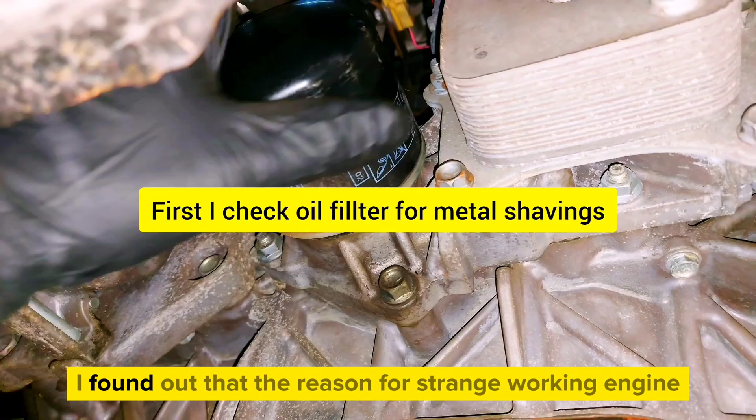Often in your comments you are asking when the part 2 of the Mazda video. So in part 1 I found out that the reason for a strange working engine was a crack in the crankshaft. So I need to disassemble everything to take off that broken crankshaft. So this is part 2 on the way of removal broken crankshaft.

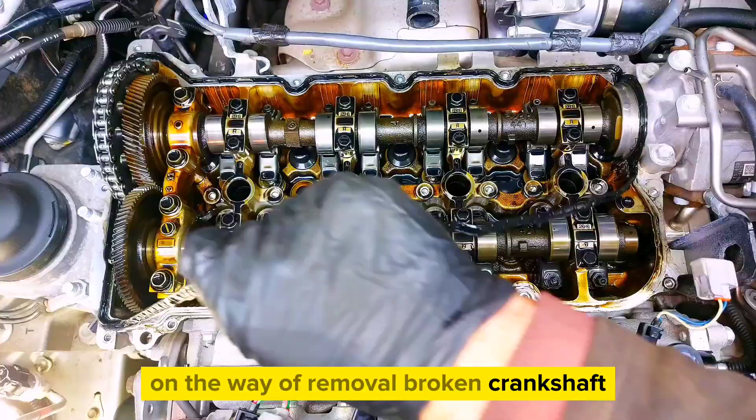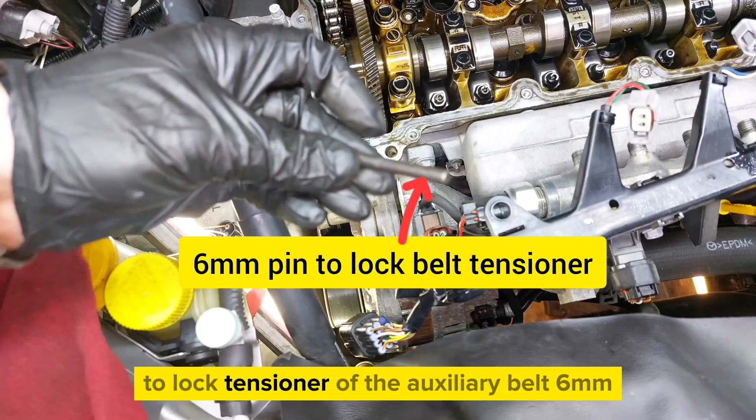6 hex to unscrew this pulley. You can hold with a 21 mil socket. And take off auxiliary belt. You will need locking pin to lock tensioner of the auxiliary belt. 6 mil.

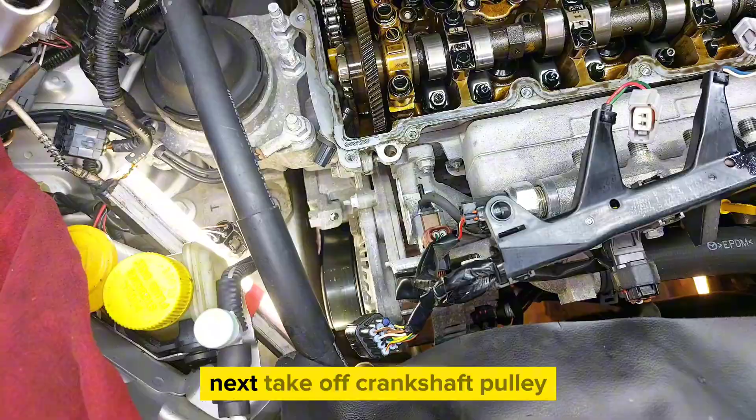Then drop it in the hole of the tensioner and rotate tensioner clockwise until this pin will lock the tensioner in this spot of the tensioner. Next, take off crankshaft pulley. And maybe you will notice some leakage from the oil seal, from the crankshaft oil seal.

Of course, you need to jack up the engine because you will have to take off engine mount. 17.

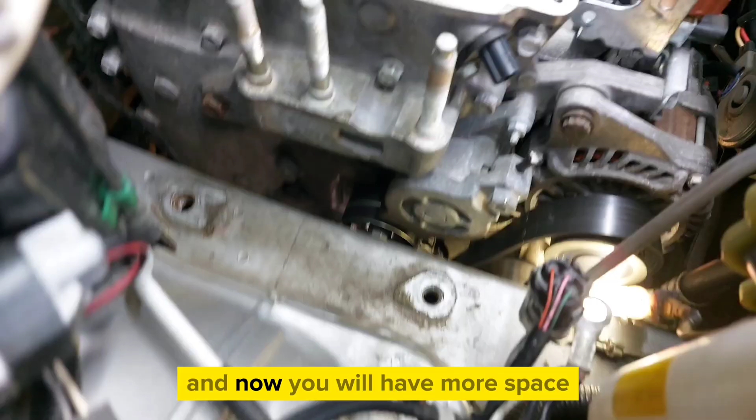And now you will have more space to remove auxiliary belt tensioner. It's 10mm socket or wrench to undo 2 nuts and 1 bolt of the tensioner. And you need, of course, remove locking pin and then undo lower bolt. Here it is. Now I can easily remove this tensioner. Just lift up engine high enough so you can easily remove tensioner.

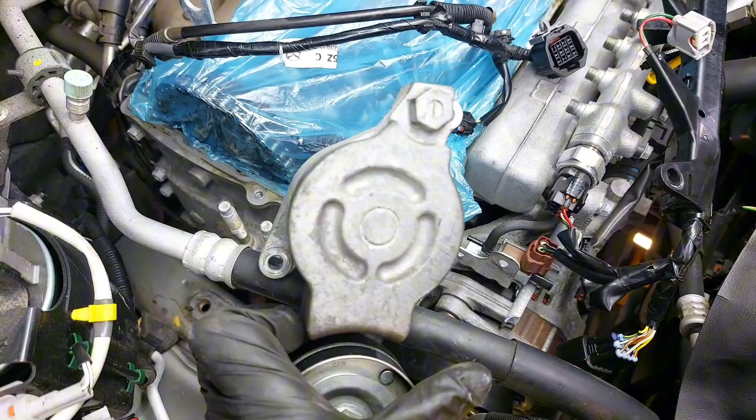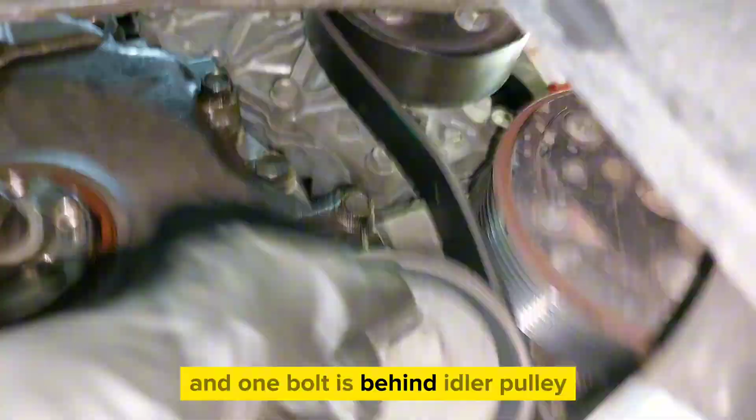Next step is removal of the timing cover, and you're gonna need 10 and 12 and 14 sockets. And these bolts have different lengths, so maybe you want to mark them before you unscrew. Also detach camshaft sensor. And 1 bolt is behind idler pulley, so you need to take off this pulley using 14mm socket. Next, using 10mm socket or wrench, take off crankshaft position sensor.

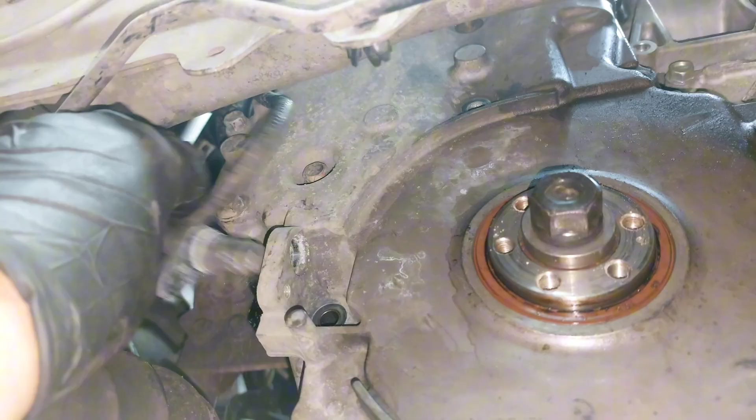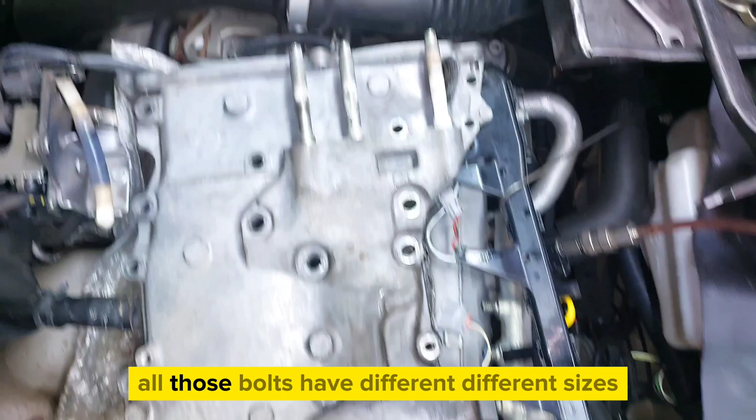And when you undo all the bolts of the timing cover, you can now separate it from the block. There are some special places for this procedure. And oops. Here it is. All those bolts have different sizes, so be careful when you install them. Some of them are longer, some of them are shorter.

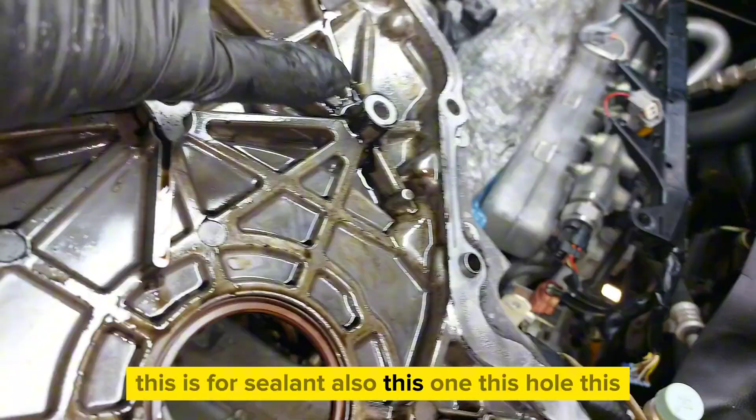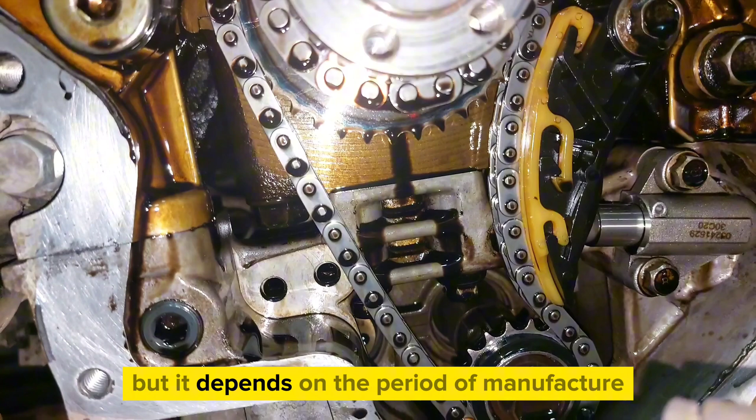And this is how you can apply sealant on the timing cover on those places. This is for sealant, also this one, this hole, this, and outside. Now we can set up engine on the timing marks. Camshaft timing mark is this big arrow pointing on 12 o'clock. Sometimes there is additional balancer chain guide, but it depends on the period of manufacture, so don't worry if you don't find it on your engine.

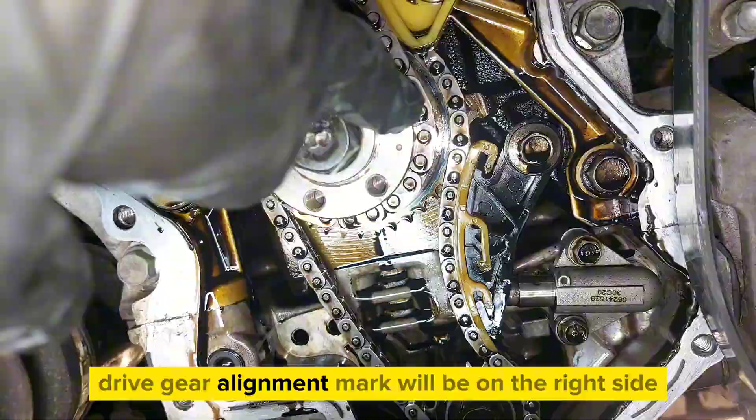And here it is, crankshaft timing mark for the main timing chain, and in this position pin for the crankshaft pulley will be on 12 o'clock. That means that cylinder 1 is in TDC, top dead center, and balancer chain drive gear alignment mark will be on the right side, and in this position colored links on the balancer chain usually will not match with the pin alignment mark on the sprocket. I show you why is that during the installation.

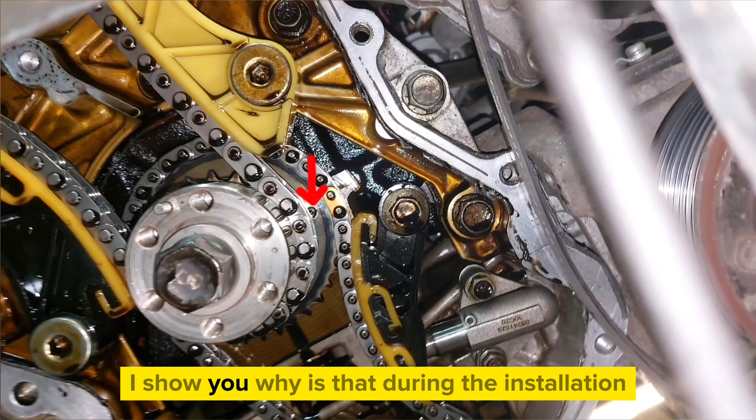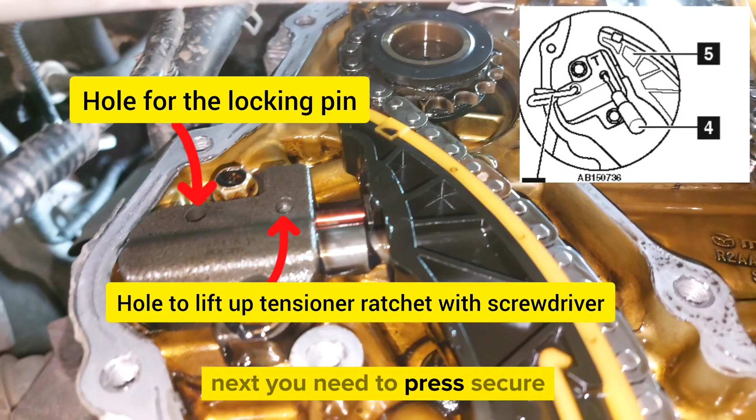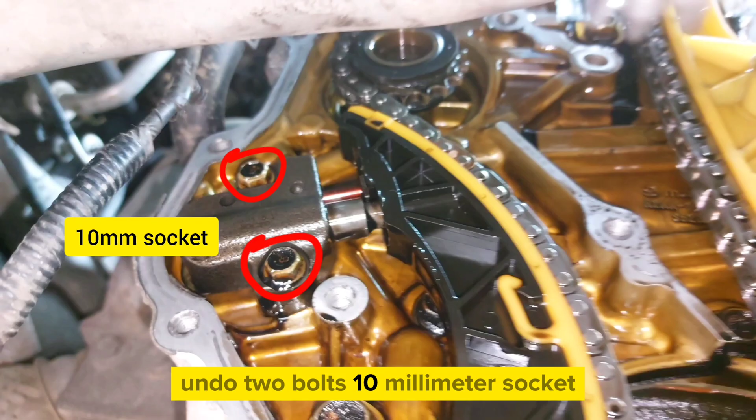Undo 2 bolts, 10mm socket. I decided not locking this tensioner and take it off as it is. Nice and gentle. And now this tensioner also go off. 10mm socket, and it locks in this place, and 8 hex to undo all these bolts of the timing chain guides.

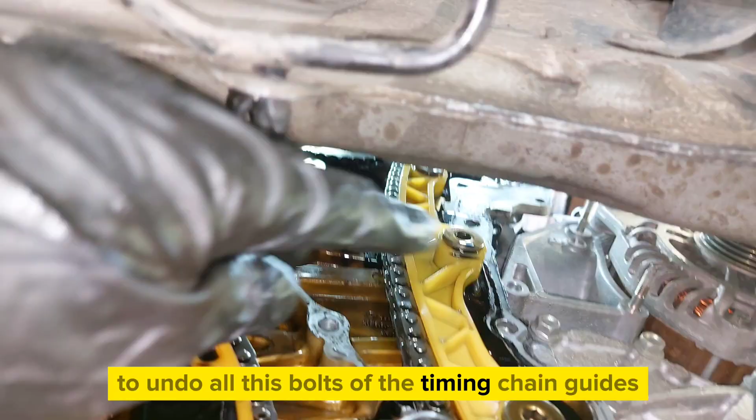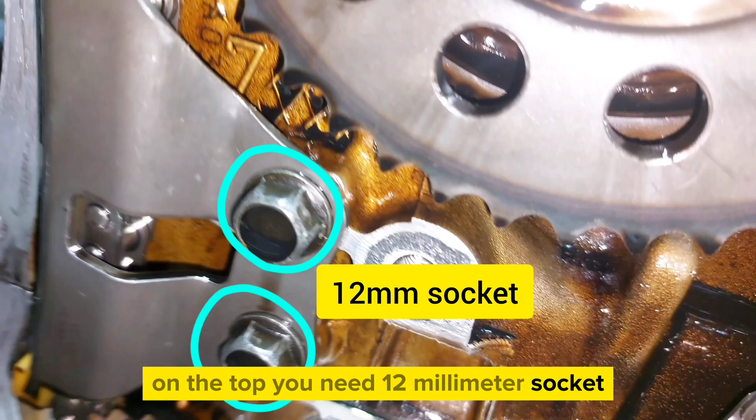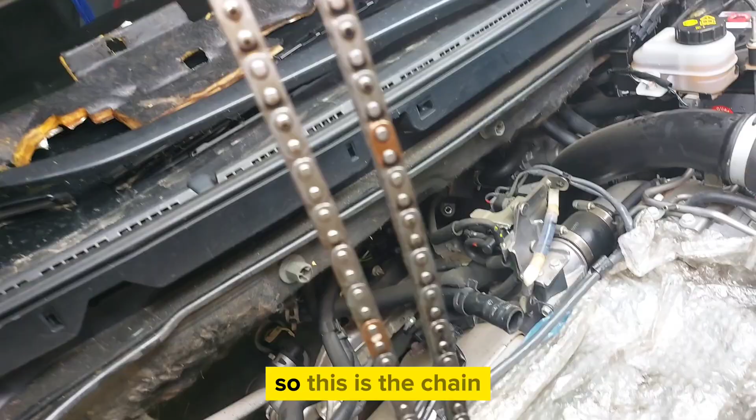To undo, this is 12. On the top you need a 12mm socket to undo bolts of the timing chain guide. So this is the chain. And you will be able to see alignment marks for camshaft gears. It's two dots on the right side and one on the left. By holding exhaust camshaft with 27mm wrench, you can undo camshaft sprocket.

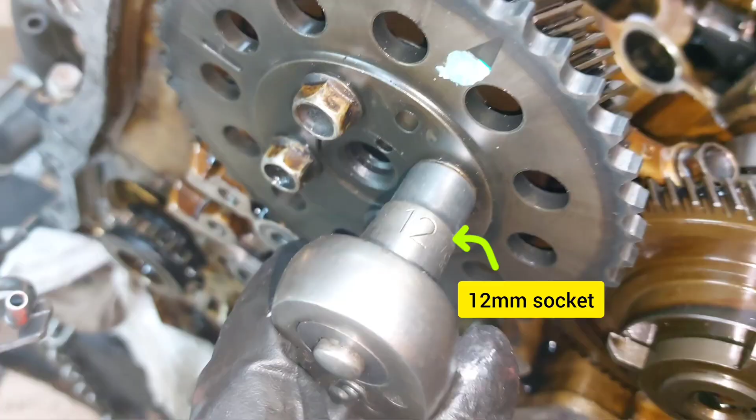And without this sprocket, camshaft gears alignment marks will be looking like that. For now, I will skip part of the engine removal, disassembling, assembling, just to complete this guide of the timing chain replacement. So removal, disassembling and assembling engine will be in the next part, maybe 3, maybe 4.

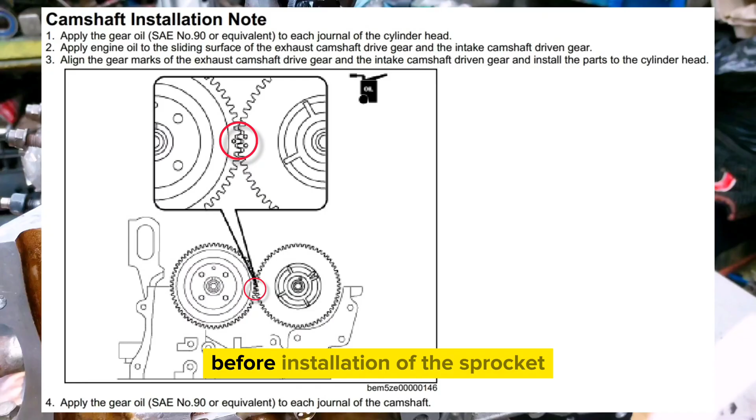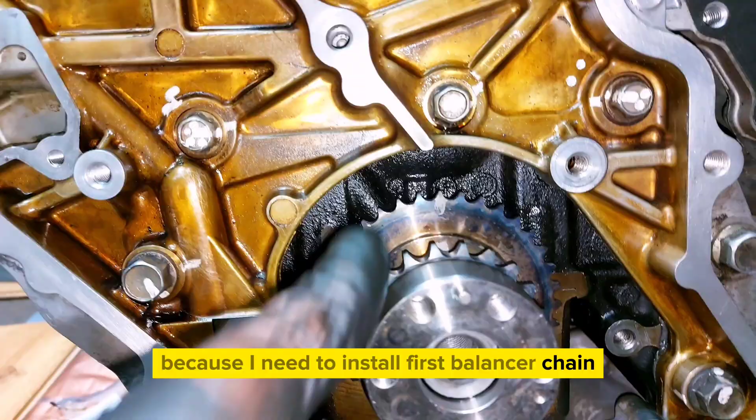Check alignment marks of the camshaft gears before installation of the sprocket. So install camshaft sprocket. And just to show alignment markings for the timing chain, I will install crankshaft sprocket, but then I will remove it because I need to install first balancer chain. So this is set up for the timing chain of the crankshaft and camshaft.

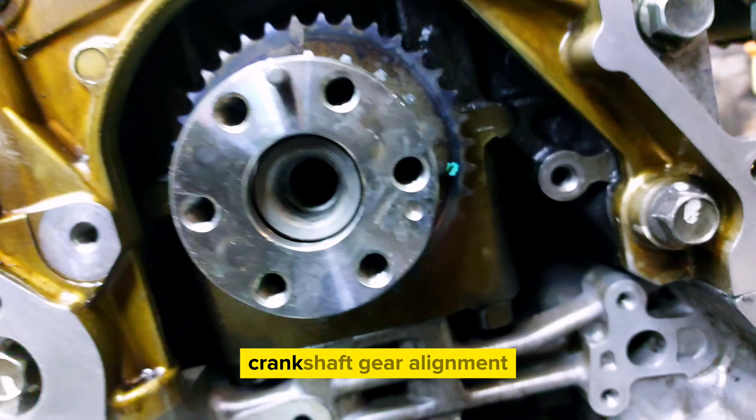Mark on the left should be on the edge of the cylinder head for camshaft gear alignment and crankshaft gear alignment. Timing mark. This one on this gear. In this position, pin for the crankshaft pulley will be on 12 o'clock. And also key on the crankshaft will be on 12 o'clock. And that's TDC for the first cylinder.

Pin for the balancer chain will be on the right side. And this is not correct position for the installation of the balancer chain. And colored links on the balancer chain will not match with alignment marks. So to install balancer chain 100% correctly, piston in cylinder 2 must be in TDC, top dead center. Then alignment pin will be on the left side, and that is correct position for this alignment pin of the balancer gear.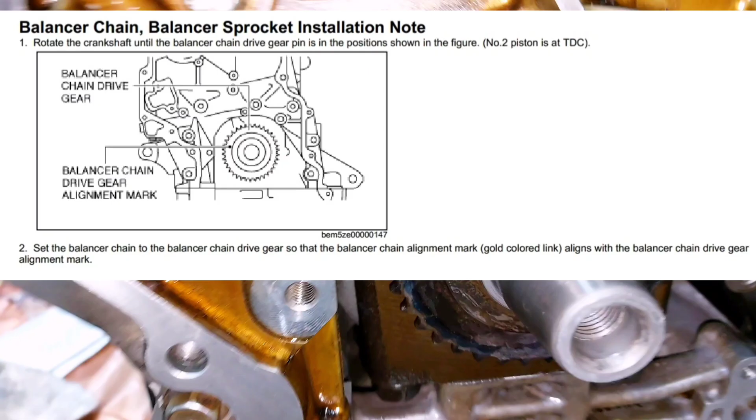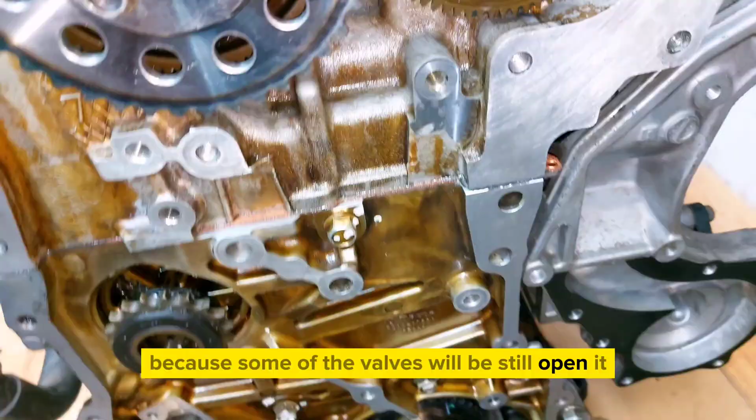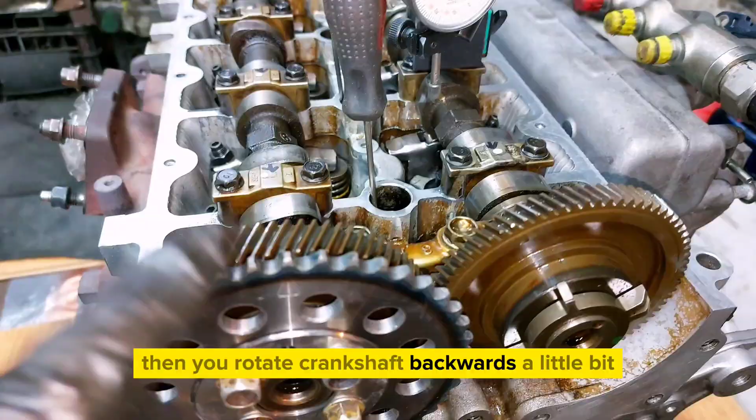So now to know in which position is this piston in second cylinder, you can use screwdriver or indicator. Then rotate crankshaft anti-clockwise direction, just a quarter of turn, because some of the valves will be still open and they won't let crankshaft rotate, so you need to rotate also camshafts to close those valves. Basically, you will notice when you rotate crankshaft, it will stop and you won't be able to rotate it anymore. Then you rotate crankshaft backwards a little bit and then rotate camshafts.

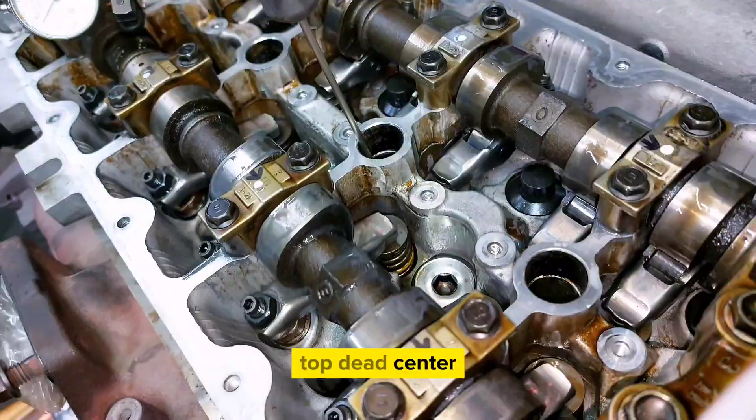So camshaft lobes will be on top in cylinder 2. These two must be on top. Then you rotate crankshaft in clockwise direction, and this goes up and stops in TDC, in top dead center. So this pin is on this side. Key for the crankshaft sprocket will be on 6 o'clock, and also this one tooth will be on 6 o'clock. 6 o'clock.

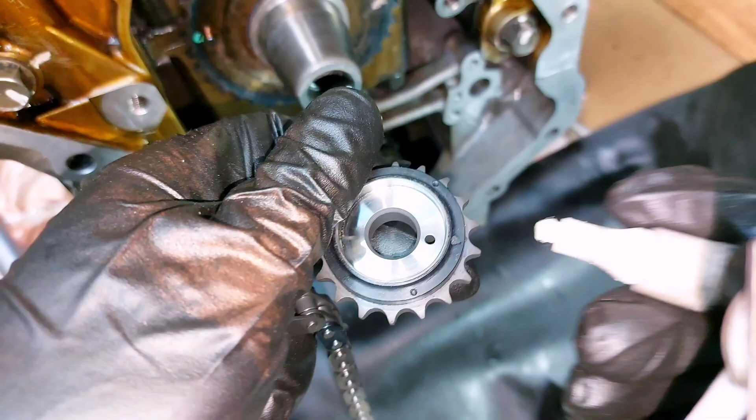So balancer chain has these two colored links that you need to align with the markings on the sprockets. You can mark alignment arrow on the balancer sprocket, so you will know where it is during the installation and later when you rotate engine. And now you can install balancer chain with sprocket, because if you install sprocket first, you won't be able to install chain. Now you can also paint this one.

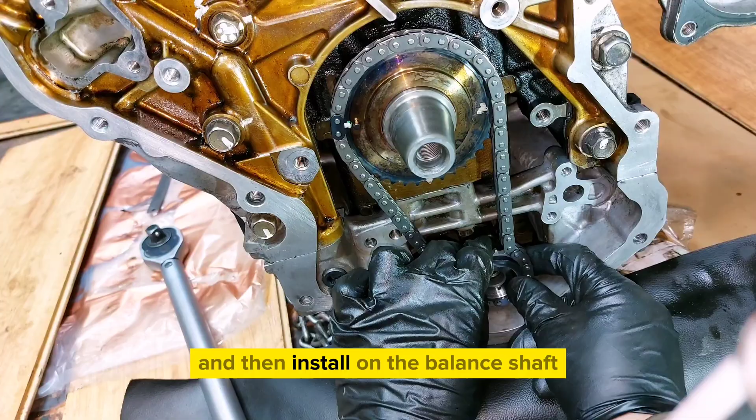Install on it. And then install on the balance shaft. And use some small amount of thread locker. Make sure everything is in place. And just to make sure that everything is correct, you can count these links. It must be 11 of them between these two colored ones. 4, 5, 6, 7, 8, 9, 10, 11. And tighten this bolt. Hold.

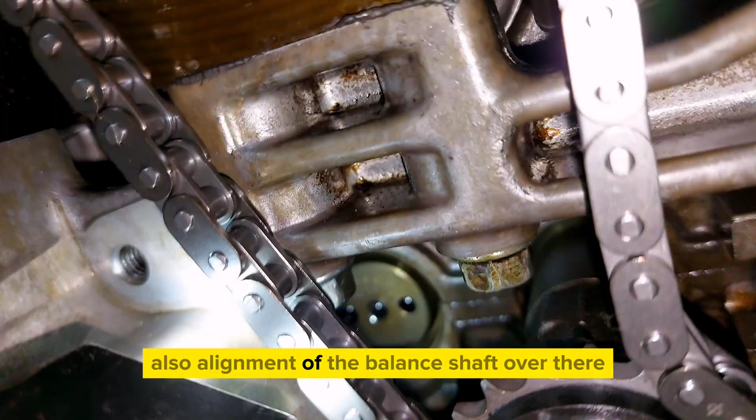So this is set up for this chain. If you want to do this, or maybe you were wondering why the markings on the chain do not match with markings on the sprockets. Also, alignment of the balance shaft over there. Straight line. These two holes in the balance shaft.

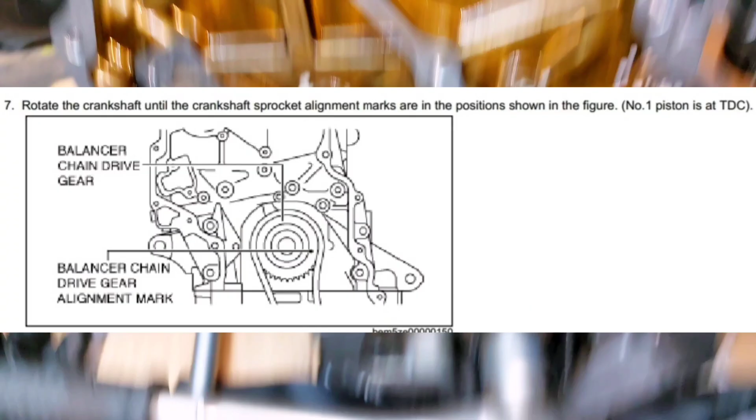Now set up piston in the first cylinder in TDC. So you need to rotate. And if you feel some resistance, go back a little bit, rotate camshafts, and these two marks align. It will be looking like this for top of the camshaft lobes. Slowly rotate crankshaft clockwise a little bit more, and you need to notice the moment when screwdriver goes down. It means piston 1 is passing TDC, so you need to stop.

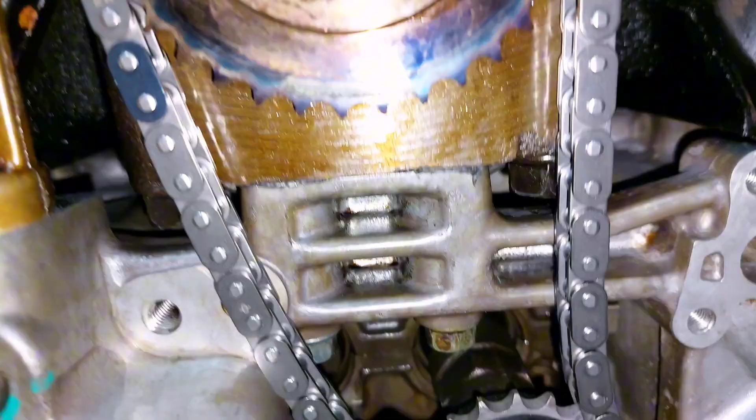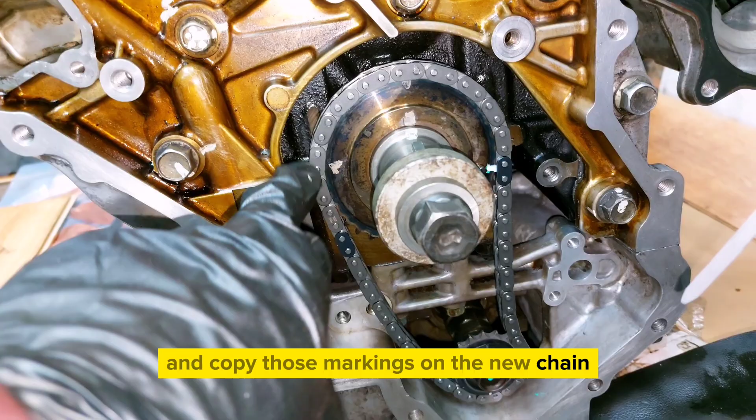As you can see, when you set cylinder 1 in top dead center, colored links may be in these positions. And this one is straight. This will be a little bit offset, but when you install tensioner, everything will be back in place. If you don't want to do this stuff with first cylinder in TDC and all this, you can just put your own markings, then copy those markings on the new chain, and that's it. Very good.

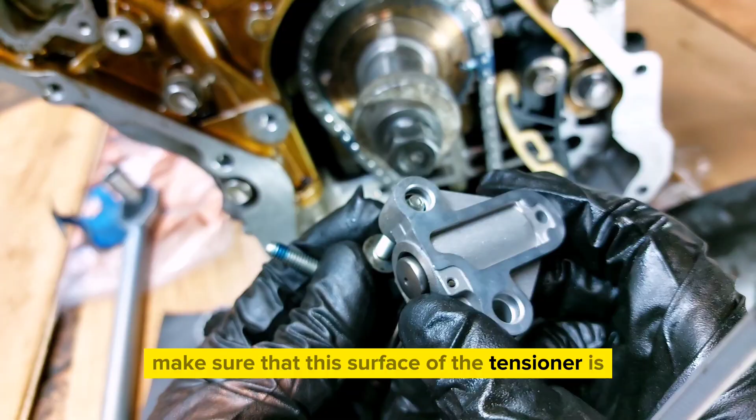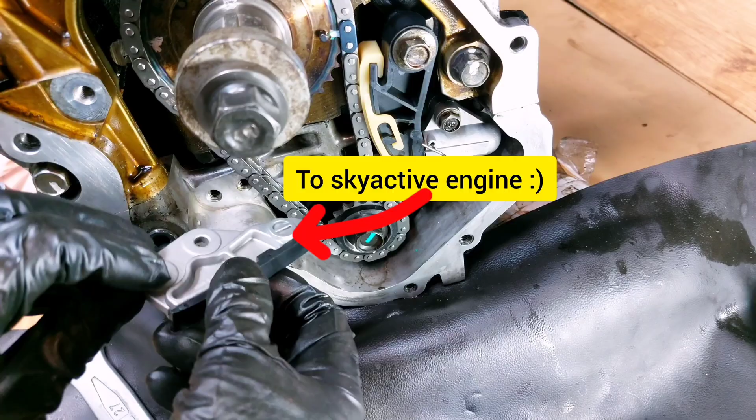New tensioner, new guide, some fresh oil on this bolt and Loctite. Make sure that this surface of the tensioner is good, no damage on it. Just don't pull this pin yet. Do not release this tensioner. This one goes here. And this is not correct balancer chain guide for this engine. This one is correct.

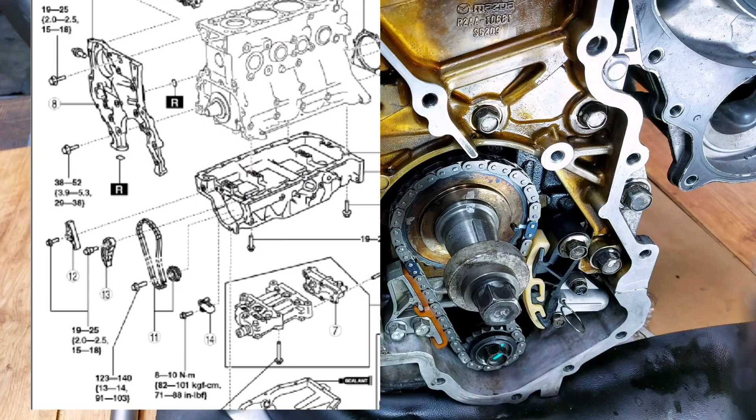New tensioner. Also check surface for damage or anything. Also, don't remove this pin before you install this whole chain and everything else. Pay attention to the surface of this gear. This is where the sealing is running on it.

Main timing chain also has these colored links for alignment on the sprockets. So one goes here and one goes in here.

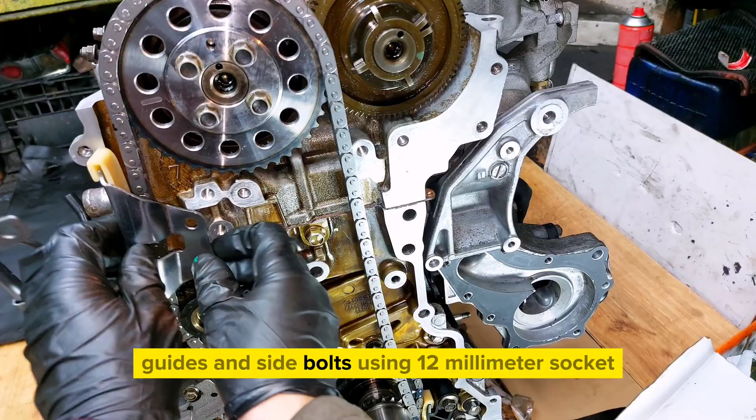There should be 25 links from the colored link on the camshaft sprocket up to the colored link on the crankshaft, so the colored link on the crankshaft will be 25th. Install the upper timing chain guide and tighten the bolts using a 12mm socket. 12mm socket. Timing chain tensioner guide. And it's really not a bad idea to lubricate all those guides for the timing chain and balance chain.

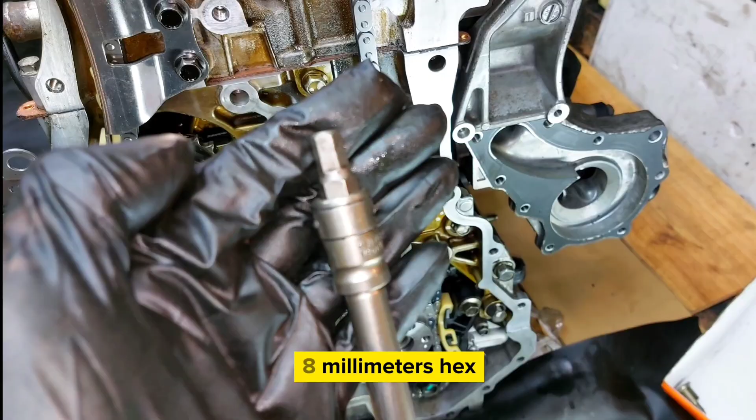8mm hex. And the final boss of these guides. This side. Oh, like this. I don't know. Oh my god, I don't know. No, it's only in one position. This position.

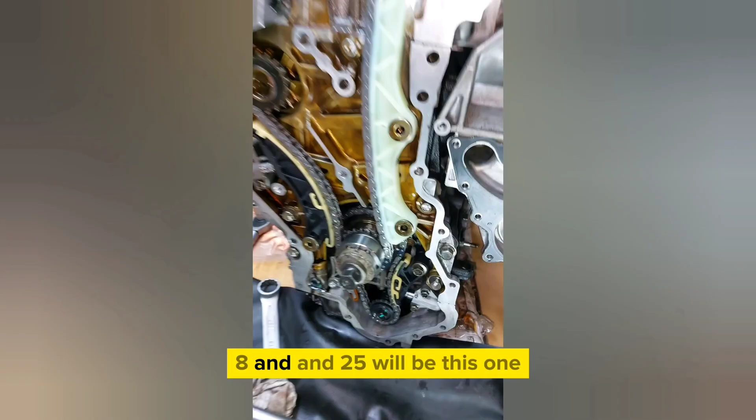Tighten bolts. And these are some tightening torques for the tensioners, guides, and some sprockets. Check all alignments. There should be 25 links. If you count from this one, 1, 2, 3, 4, 5, 6, 7, 8, and 25 will be this one. In between, if everything is correct, chain. Guides, these grooves.

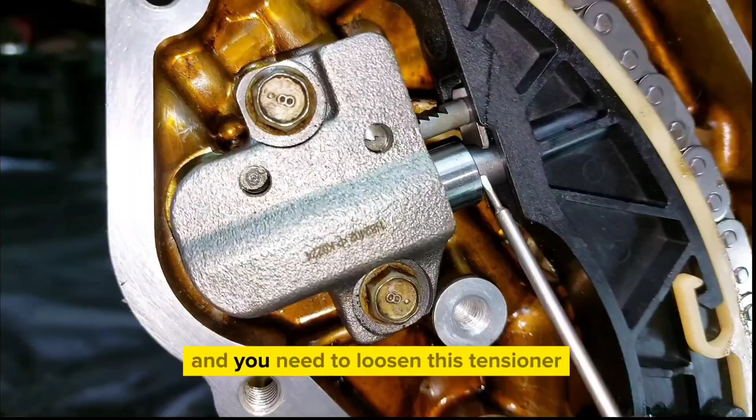Okay. Now we can remove this locking pin. Remove this. Everything in place, it's good to go. Rotate everything twice. If you forget something and you need to loosen this tensioner, you need to push this ratchet up with a screwdriver and push the tensioner in this direction.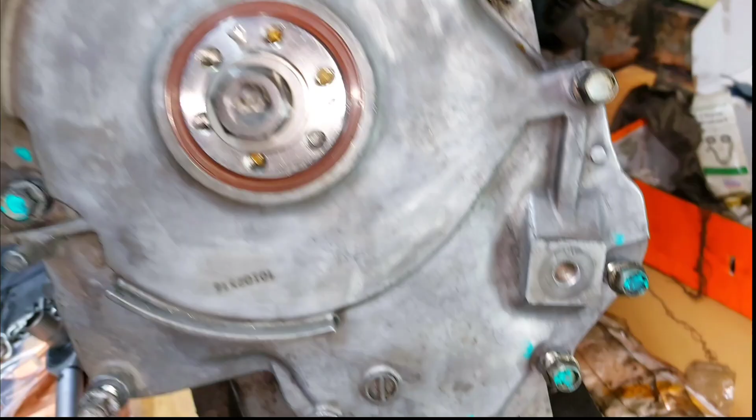Short bolts. And those bolts without paint are the longer ones. Without paint, long bolts. Now torque them down. These bolts are different, it's a 14mm socket and different tightening. And then it's time to install the cylinder head cover, and just follow these steps.

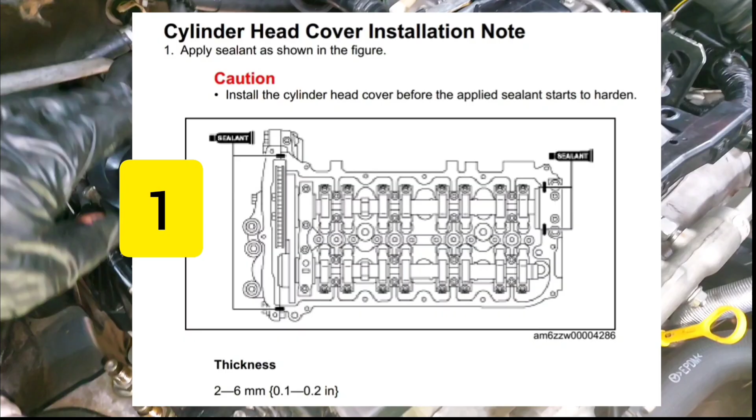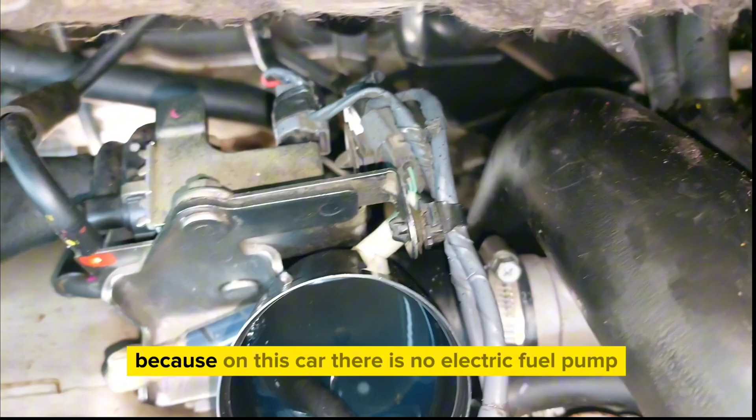And of course you will need to bleed the fuel system. You can do it with a hand pump. When you press the hand pump, it will blow out all the fuel with air through this pipe. You can connect a hose on the return line and put it in a cup, and you will see bubbles coming out. You need to do all this priming of fuel into the system because on this car there is no electric fuel pump. So when you start the engine with no fuel in the fuel system, you can simply kill all injectors and the high pressure fuel pump.

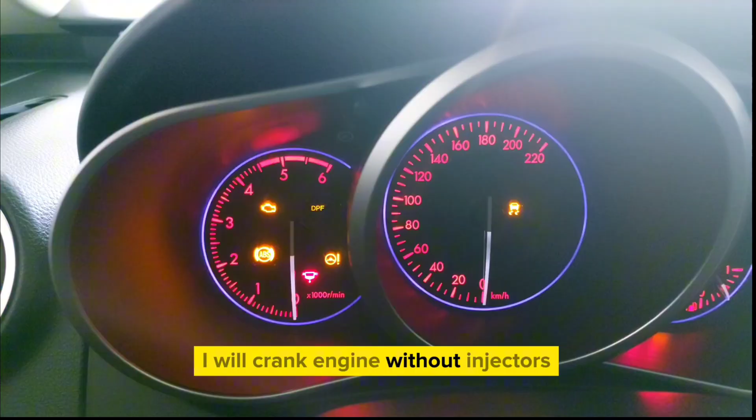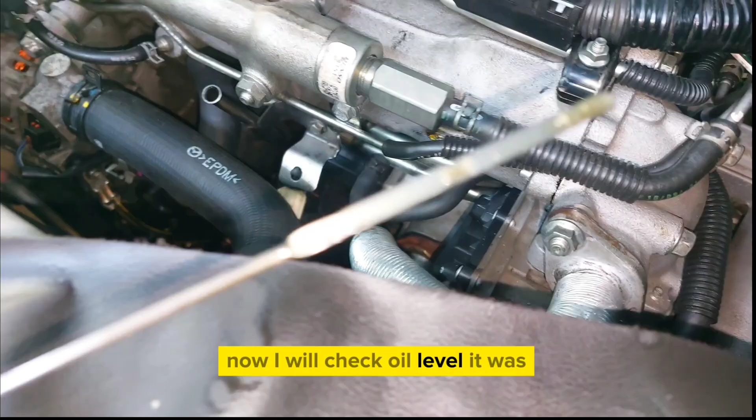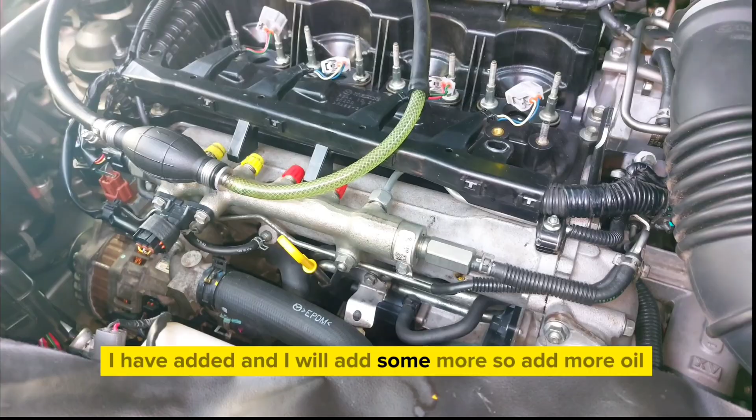Also, to build up oil pressure in the system faster, I will crank the engine without injectors. So this. So now I will check the oil level. It was full before I cranked the engine, and now it's low, almost low. So you know that the oil pump is pumping oil. It's about 5.5 liters I have added, and I will add some more. So add more oil. Check level.

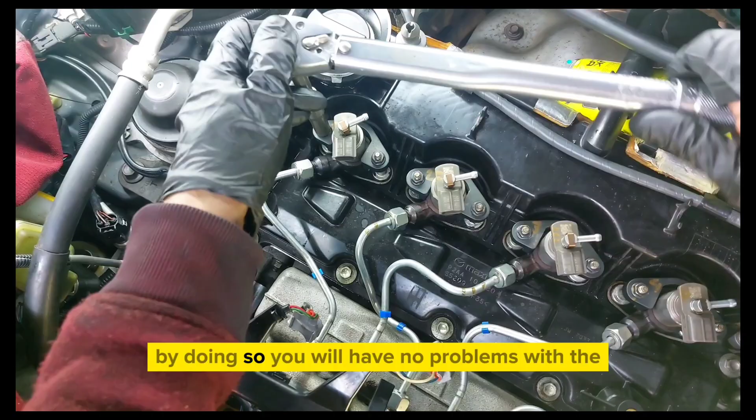And of course you need to clean all the injector bores before you install the injectors back in place. New copper washers. Install injectors. Now all clamps in place. Install the high pressure pipes, tighten them by hand, and only then torque down the injectors. By doing so, you will have no problems with leaking pipes. Yes, from both sides. That's it. And do the same for each.

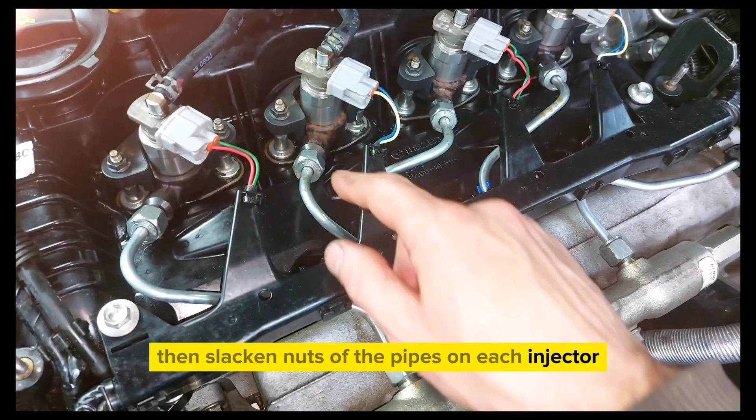I disconnect the high pressure pipe of the first injector, then through this pipe, with help of the hand pump, fill the common rail tube with fuel, then slacken the nuts of the pipes on each injector, wait until air comes out from each of them and torque them down. Fit the first high pressure pipe back in place, but don't tighten the nut so the air can come out.

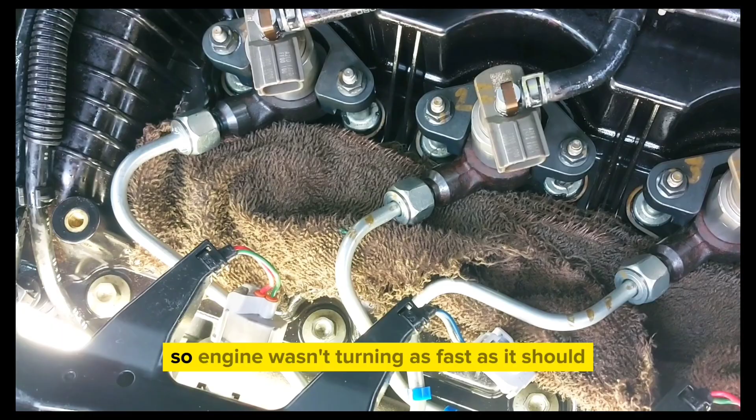Then, without connecting plugs to the injectors, crank the engine so trapped air comes out from the pipe of the first injector, and when only fuel without air flows, tighten the nut on the injector, crank the engine one more time, then plug in the injector connectors and start the engine. I had a low charge on the batteries, so the engine wasn't turning as fast as it should, and you can see fuel with bubbles coming out from the pipe of the first injector, and when I charged the battery everything went a little bit faster.